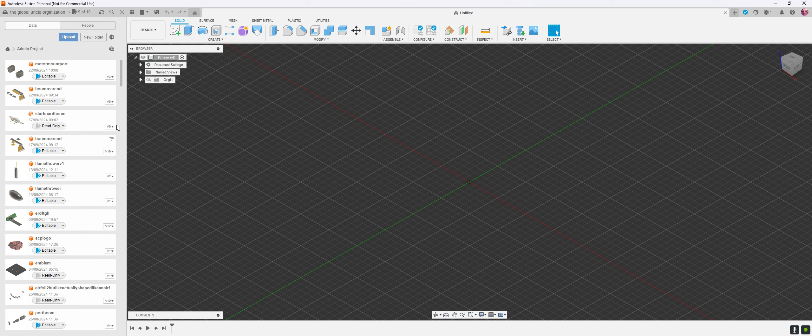So progress is coming along slowly. I've got school and stuff, so yeah. However, I've also been downgraded from my education plan to a personal plan. I don't know how long that's gonna last, because I'm pretty sure it costs money.

So maybe I'll get kicked out at some point and I'll have to switch to FreeCAD or Onshape. So it goes. They're both, well, Onshape is fine, FreeCAD is less. Also, you can't full screen Fusion without it just going black for some reason. I don't know why, it's not the end of the world though.

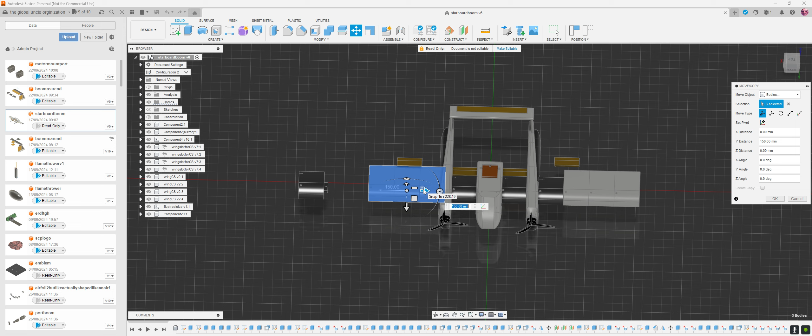Anyhow, so you can. Can I move bodies? Select all these. Yes, I can. Here, 1, 2, 5. Good enough.

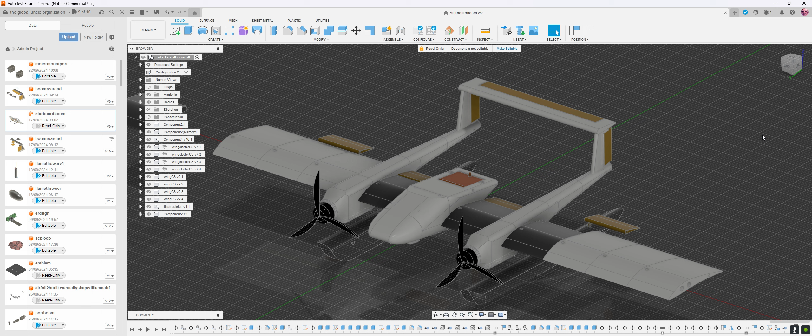Anyhow, you can see a rather more refined version of the aircraft here. This is still a work in progress, but I will get to that, as I'm sure you can notice over here.

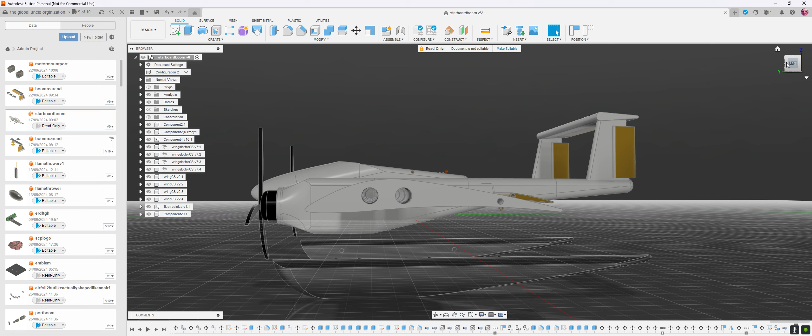I spent a lot of time refining the wing shape so that it's actually airfoil shaped and will produce lift, ideally. This is optimized for fairly low speed flight, like 20 to 30 miles an hour. Very low speed. But this may be too heavy for that, so it'll probably be higher.

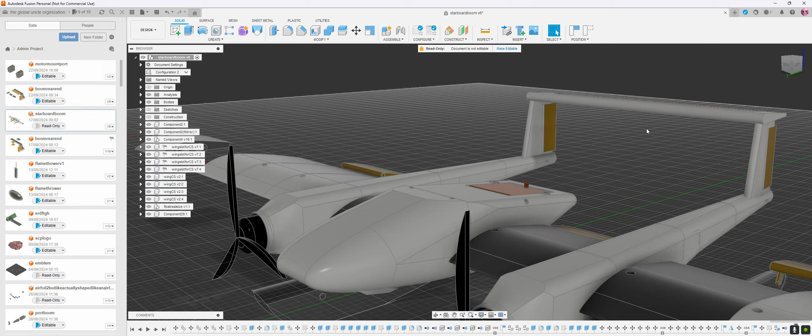This center fuselage thing I made a long time ago, forgot about it, tried to design another one, and then failing that, came back to this and found out that it was actually like perfect. I still have no idea how I designed this thing. I wish I did because I really like the design and wish I could tweak it a little bit, which I have, but still would have been nice to see each step.

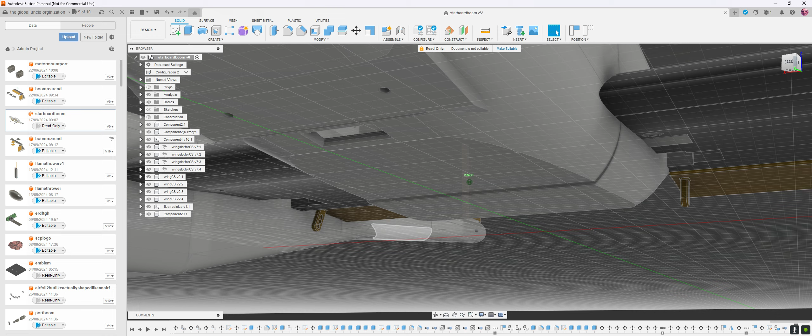Anyway, I've added a door with an advanced rubber band holding system here to keep it closed. Very high tech, I know. And then I've added a sort of mount under here for probably a camera, but really whatever. It's a sort of standardized mount. You got holes into the thing, and then make it editable.

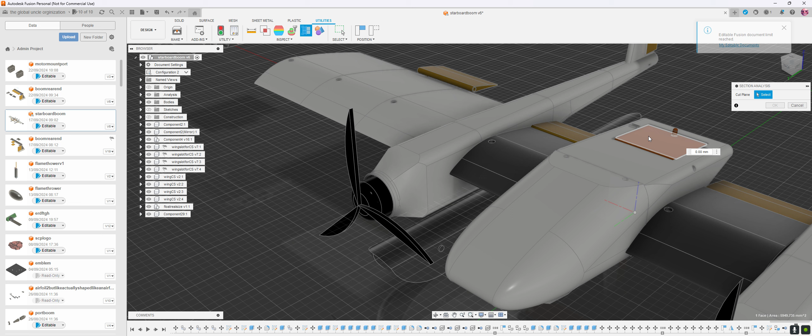If we head over to utilities here, section analysis, there, down. Yep, and you can see the inside of this.

So this brings us to another point: the inside of the wings.

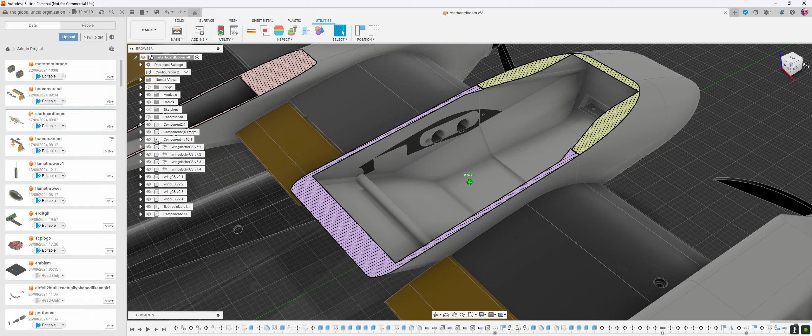The big deal with these is that there are channels inside. I do not have this lined up properly, but it doesn't really matter. There are channels inside for you to thread stuff like wires through. And those wires will most likely be for lights, but also servos.

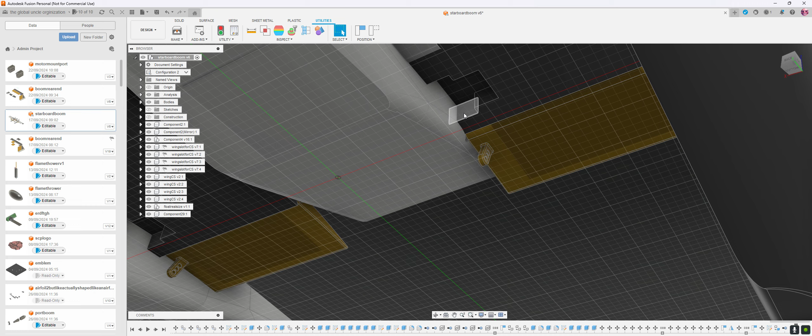You can see I have this little cutout for a standard micro servo down here. It takes forever to get the little plastic bits out, but there's even a hole for the wires to go into the wing channels, so you don't have to have stuff on the outside. You got the screw holes there, and my attempt at a servo horn type thingy to mesh up with the servo.

Do I have... I guess I don't have. Okay. Well,

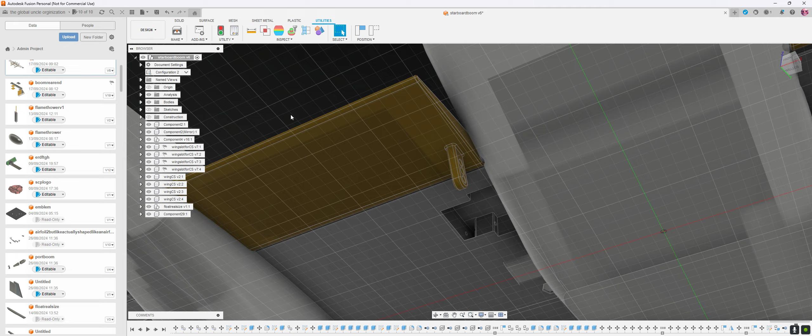So this is the basic shape of the aircraft. I am still working on these fuselage bits.

Trying to make them modular yet light enough, and also trying to figure out some sort of mounting system inside the actual things. What I'm thinking is sort of a Picatinny rail type system where you can slide little shelves into them and store stuff like that. I don't really know how to secure them yet, but I guess we'll get to that.

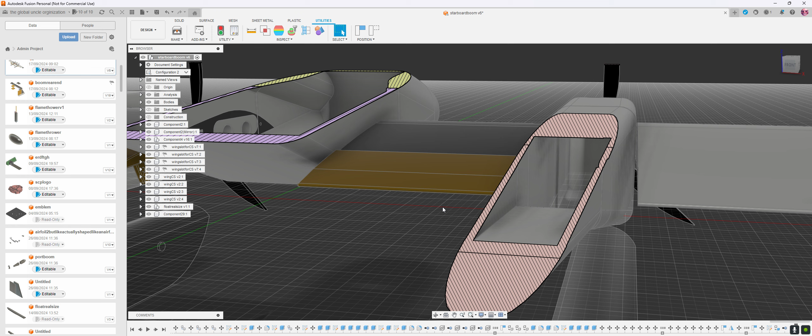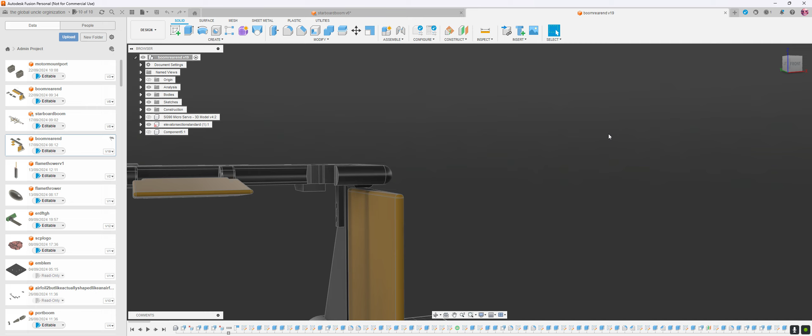Anyway, my most recent work of not art, fiddlesticks. You gonna work? Yes, alright, I guess I just made a copy or something. Not sure why I have two of these. Anyhow, this is what I have been working on recently.

So I have a basic setup for the rear control surfaces. We have a vertical stabilizer here, rudder here, and then if I were to...

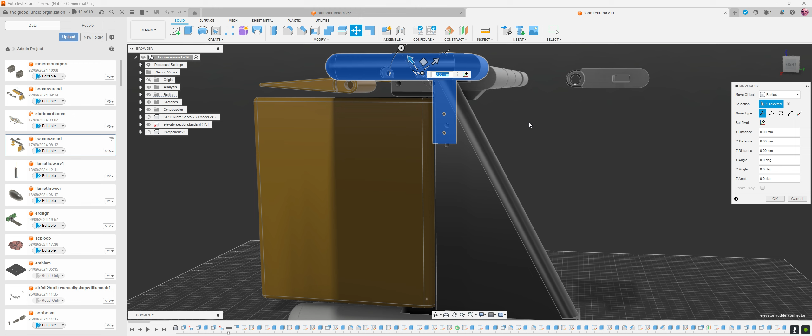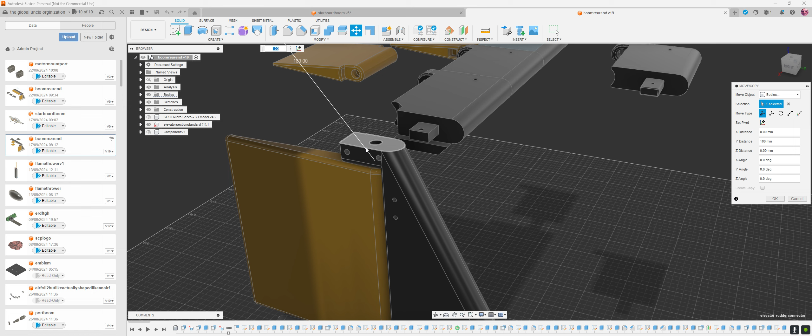If I were to move this up, you can see that this vertical stabilizer can actually work without a top piece. It's all triangular, it's still aerodynamic and such, so you're not going to be sacrificing too much by using this instead of a purposely designed vertical stabilizer. I don't know.

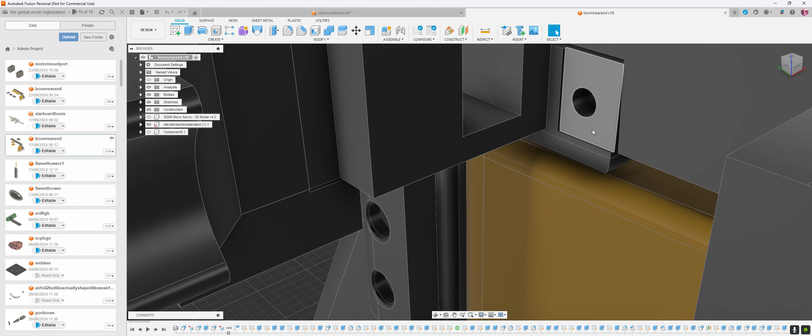So you've got that. Servo mounts down here in the fuselage. This slots in like so, I guess. And then up here we have another servo that's probably there for a reason, I think. Oh no, that's part of the vertical stabilizer, I think.

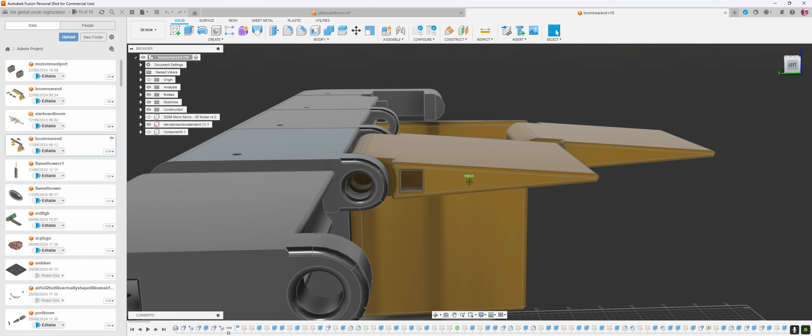Anyway, servo goes here, wires go through there, down there. I'll have to add a hole there. And then these things, the actual elevators, they slot into here, and you can use a pin that goes through there to secure them. There's a little hole here so that you can link them together so you can operate more than one with one servo.

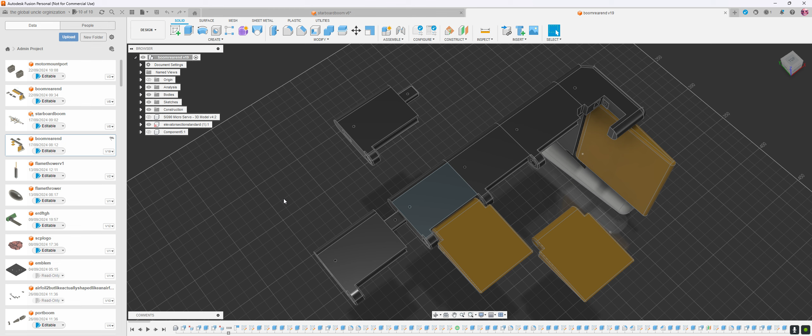And that is about it. One of these needs to be somewhat finely adjustable, just so that I can make them pretty standardly sized and also have them fit without excess strain on the fuselages, either pulling them together or pushing them apart.

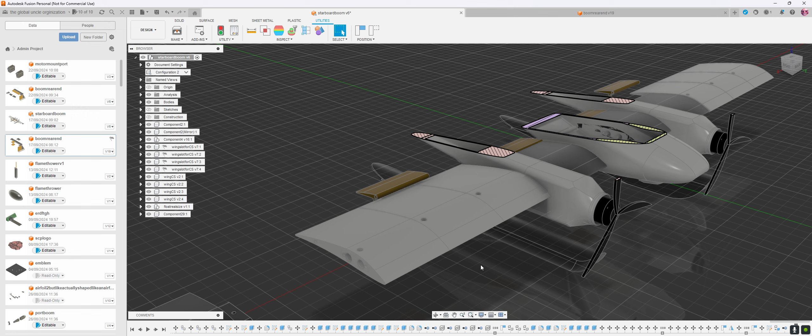So I still need to do... well, I need to add some polish to those motor mounts. I still need to do wing ends, make those nice and aerodynamic. Fuselages, I have the shape, I got to figure out how to separate them into parts and then join those parts together in a relatively lightweight fashion.

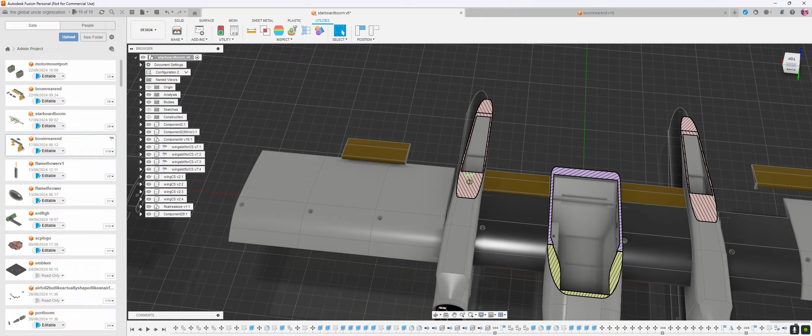Landing apparatus needs to still get done, but torn between floats or wheels. It's going to be skis at this point, honestly. Some way to prevent the propellers from deleting themselves upon landing. And then that's basically it. Prototyping can begin, and maybe we can fly this thing.